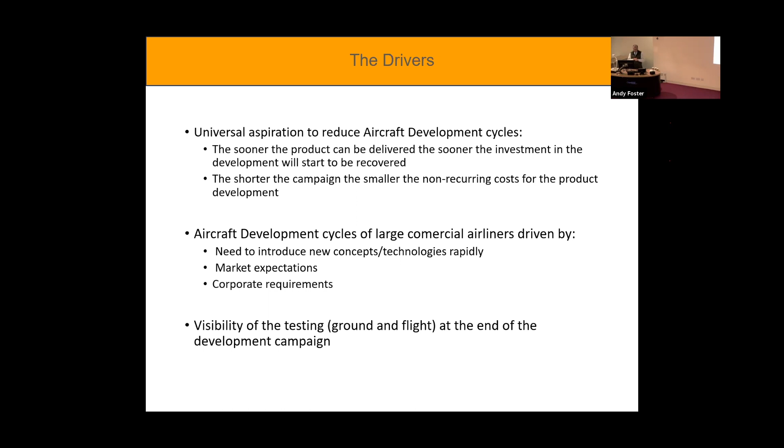The fact is that when you look at how long it took to flight test brand new models, starting with the A320 back in 1987, that airplane was certified barely 12 months after its first flight. The A330, A340 was more like 14 or 15 months. The A380 was close to 20 months, if not more.

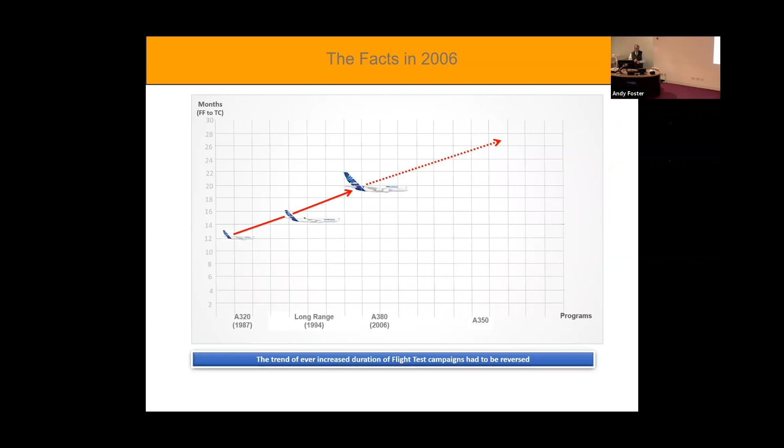I was always asking myself: how can it be that we have more and more sophisticated data analysis equipment, more sophisticated instrumentation, more powerful tools, simulation capabilities, yet we don't seem able, with all those means and processes, to compensate for the added complexity of the airplanes, the stricter certification requirements, the higher expectations of customers in terms of reliability, operational maturity, and the bigger expectations from passengers in terms of in-flight entertainment systems, quality, and better passenger experience.

So on the one hand there was a balance: more expectations on the airplane, more powerful tools, more means of doing it—and yet the net result was that things were getting longer and longer. So unless we changed something, we knew the result that was going to happen on the A350.

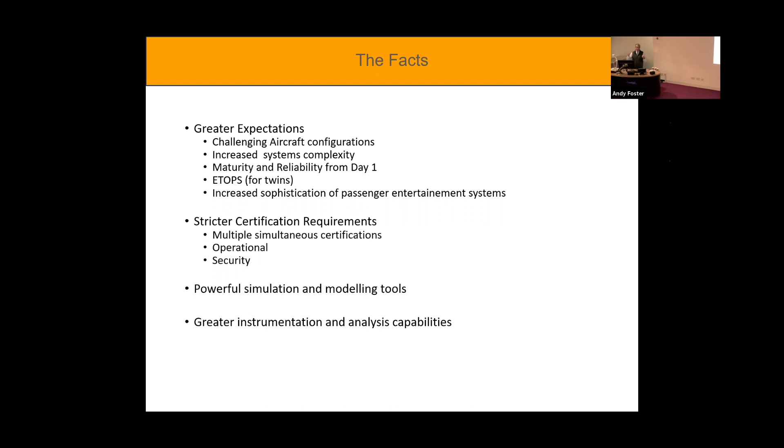So at Airbus, we decided to tackle this problem quickly. This slide lists the number of parameters that were recorded on those airplanes, just to illustrate the progress we made. The A320 had about 12,000 parameters.

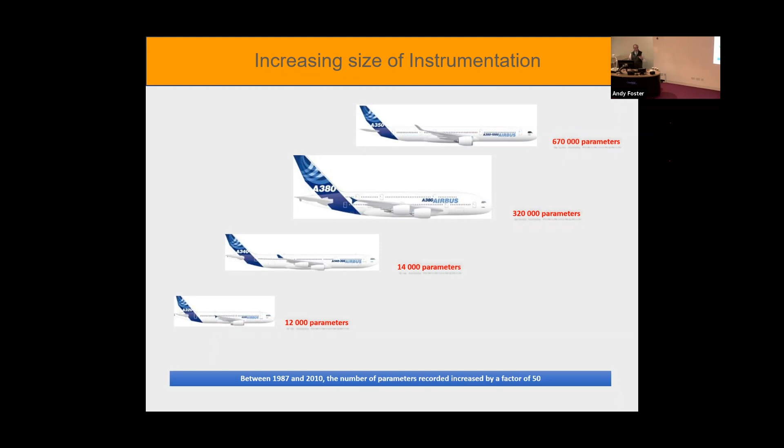The A350 had 670,000 parameters recorded on instrumentation. The investment and the quality of the tools that we had was absolutely enormous, yet the net result was negative.

So what we decided to do, I will be talking today about us flight tests or ground tests, and let me reassure you, it was not just about us. It was the whole company, the whole program, the way the program was organized contributed to this. But we, in the testing area, contributed by doing this.

What we saw is that in the past, in Airbus, we had an organization where each discipline or each engineering organization was responsible for the definition, the design, and the testing of their individual system. There was an organization which was responsible for integrating all the systems.

As the flight test organization, we were just invited or were participating right at the very end of that integration process. Frequently, I had been very vocal with my management to say, so many times we fly and we discover anomalies or behaviors of the airplane or its systems. Did you know about them? And you know what? Many of the times the answer was yes, we knew about them. And well, how come we didn't know?

So there was clearly a disconnect between the testing organizations of the individual organizations and us in flight tests, which were at the end being faced with the program. After that, we decided jointly in Airbus that we had to do something. And since I had been so vocal about it, I said, well, go ahead and do it. So that was a big challenge, but I had very clear in my mind what needed to be done.

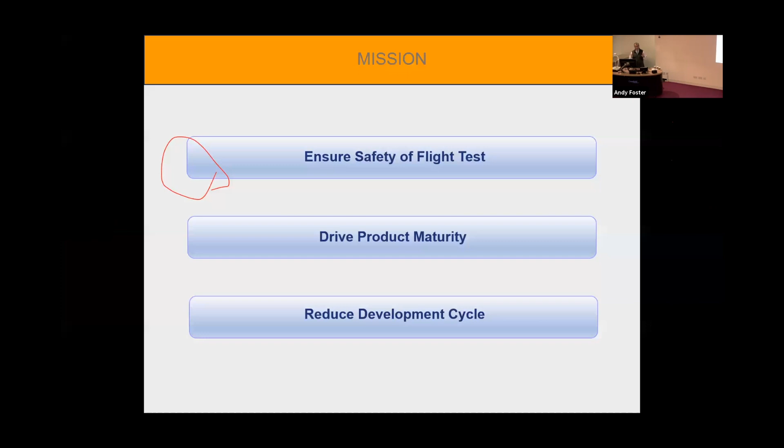We said we want to develop this airplane to drive the product maturity and to reduce the development cycle. Why drive product maturity? Because our customers were expecting an airplane that would be mature as soon as it entered into service. It wasn't the case in the past. The airplanes suffered from malfunctions, failures, difficulties in the operation of the airplane, difficulties in the maintenance of the airplane. And we discovered that late. And of course, the customers were suffering from that.

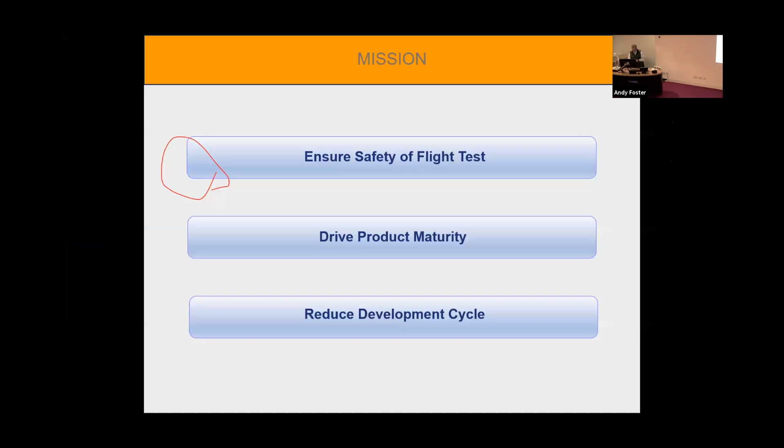And the result, what we were expecting—we tried to quantify it—we said we will reduce the development cycle of the A350 from what would have been maybe 24, 26 months. We'll bring it back to something comparable with what we managed to do back in the 1980s, which was the A320. We committed to 14 months. So that was the challenge.

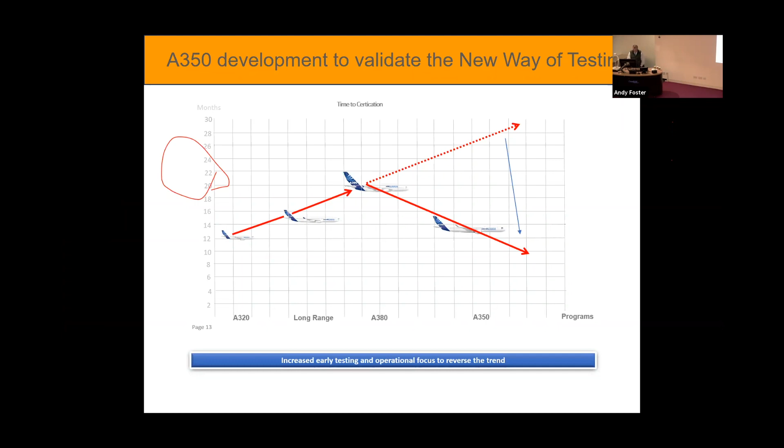Here we had a new product, where everything was new about it. We had given ourselves a new organization, new ways of working, and a very clear objective of what we wanted to do. We wanted to develop this airplane, certify it in 14 months, and achieve an operational reliability of 98.5 at entry into service. So off we went to do it, and we put our focus, first of all, on the people.

As I said, it was all about extracting from the different testing organizations that were spread throughout the different design teams, extracting those teams and those systems, test benches and others, from the design organization and putting them together in a testing organization, so that the same team would be involved in the design of the airplane and in the testing of the airplane, from cradle to grave.

Here, to illustrate that, I've listed 4 or 5 different types of staff of this new organization and where they would be involved. First, people who were defining testing strategies - what type of test means do we want, what type of instrumentation do we need, what type of simulators do we need. They were involved in the development of the A350 from day zero, from the time we were deciding what type of airplane we wanted.

The flight test crews, the pilots, the flight test engineers - they would be involved right from the very beginning, to help the design teams assess the handling qualities, the systems definition, the cockpit interfaces, all of that.

The test means people, those designing and operating the test means, were also involved from the very concept phases, in order to ensure that the airplane and its systems were designed for testability and maintainability. We wanted to avoid designing wonderful systems that were very difficult to test or maintain. So we integrated those operational concerns right from the very beginning.

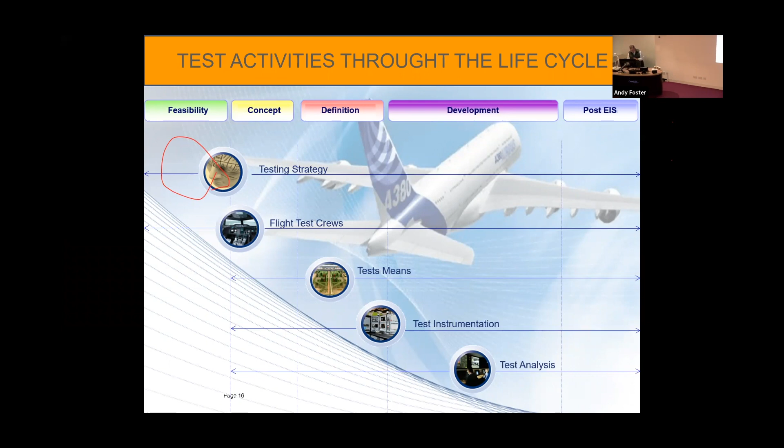And it was more than anything else - I would not say a cultural revolution, but it was a little bit like that. Why? Because we had to position this new team as the challengers of the designers. And of course, in an organization, it's difficult to say, well, why are you going to be challenging me? Are you going to be criticizing me? Do you really mean that?

So it was all about making people understand in the organizations, not just flight tests but throughout, that our job was to look at the product from a different angle than the people who had designed it. The designers looked at it from one angle; we were going to look at it from the other angle, the angle of the operator. At the end, we're building an airplane not just for us, but for our customers. So we wanted to introduce this concept: we are the first customer of the airplane. The sooner we find things we're not comfortable with, or things that don't work, identifying them as a customer would, the sooner we can fix them so the customer never has to face those difficulties.

So it was this change of culture, a different way of working, and early involvement of the test teams very, very early in the program, so they would get familiar with the behavior of the systems and the equipment.

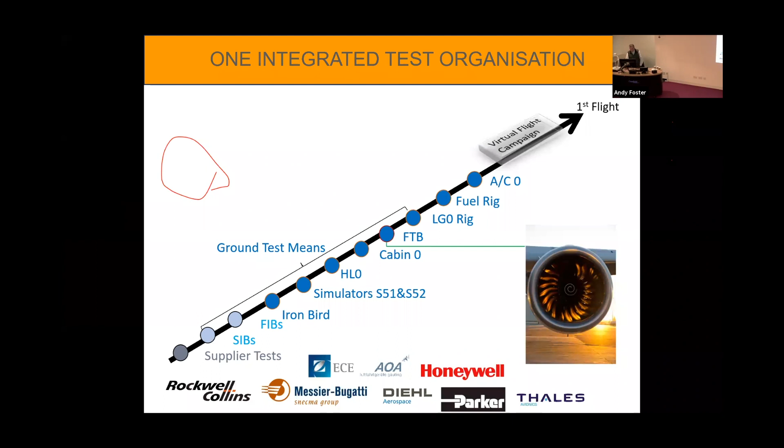So the whole point of that was to try to test upstream as much as possible, to learn as much as you can about the airplane and its systems. The sooner you test, the better it's going to be. So by the time we got to the first flight, I think we were in a really good condition.

And here I've put some pictures of the most impressive rigs. I was always really impressed by these big, huge rigs. This is the flap and slat rig, high lift rig, which is sitting in Bremen.

The flap system of the A350 is very sophisticated. It does not just do high lift to increase the lift of the airplane. It does flap cruise control, so the camber of the wing changes in cruise depending on the CL of the airplane. It is used to laterally trim the airplane. There's differential flap settings to improve the takeoff configurations and the landing drag. So it does a lot more than just purely high lift configurations like we know them in conventional airplanes.

So we had this fantastic facility in Bremen, and they were able to experiment with that, and we did learn a lot from the operation of the flap system. It was the first time we developed something like that. So we knew what we wanted it to do, we're not sure how to do it. So this was really very helpful in developing, troubleshooting, and fixing issues on the high lift system before we actually flew the airplane.

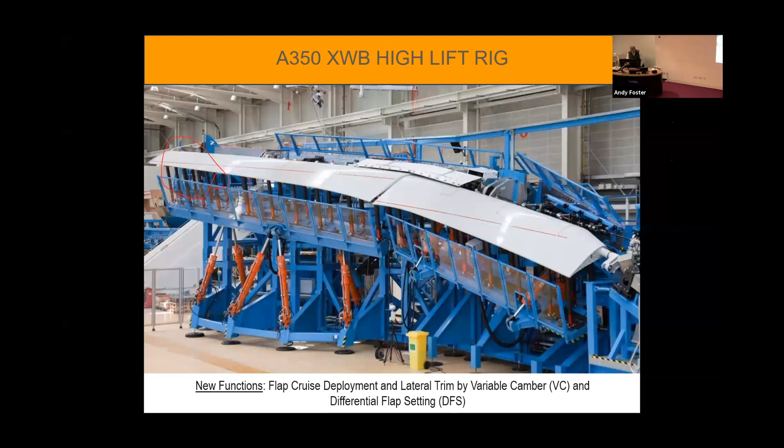This is just to give you an order of magnitude of the amount of testing. Roughly speaking, I don't remember the dates - I could find them, but I don't remember them. But roughly speaking, all these big test rigs were available about a year before the airplane flew. So there was a big effort. Again, it was all about anticipation. The sooner we get them, the better.

However, they cannot be just in any configuration. So it was all about - and the A350 program did a tremendous job - synchronizing the availability of the test rigs and the availability of the equipment to install those test rigs. Because if you have the rig but you don't have the equipment, you have done nothing. So it was all about coordinating and making sure that you have the rigs at the right time with the equipment to feed them.

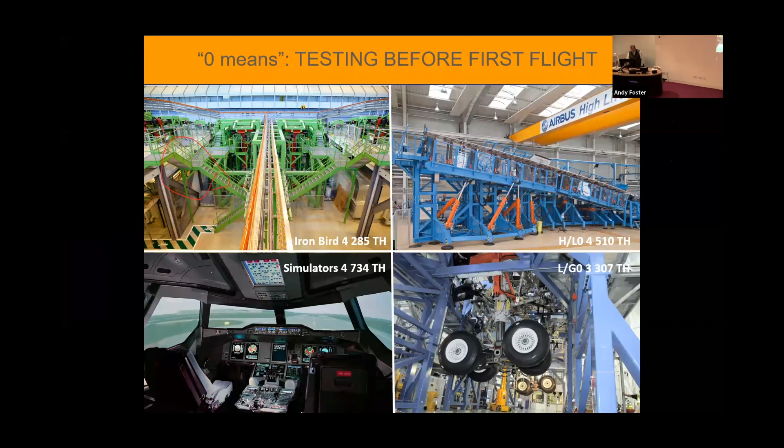And as you see there, these are the hours that we did on those rigs before the first flight. So over 4,000 hours on the Ironbird and on the high lift system, over 3,300 hours on the landing gear rig in Filton. Simulators, we had 2 simulators, 4,700 hours. So as you see, a massive amount of testing. Fuel rigs, 670 hours of testing, cabin 1,500 hours. So it was all about not just testing continuity, but testing as early as possible.

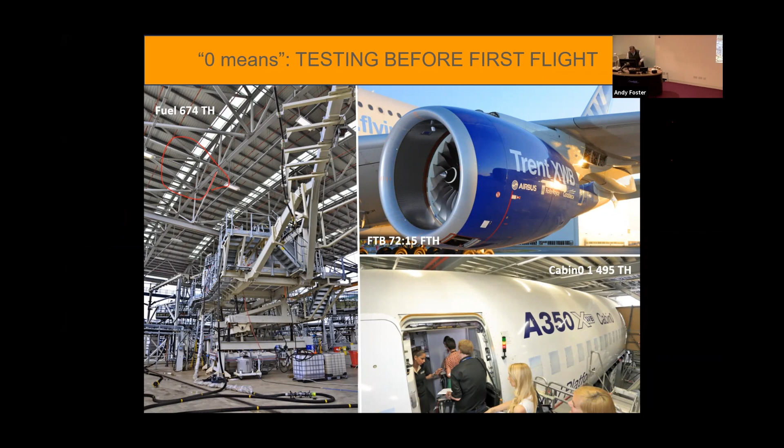Try to advance as much testing as you can. Don't wait until you fly to test. If you can only test certain things in flight, so be it. But anything that can be tested on the ground, let's test it on the ground and just learn from that. So that was the focus of the new test organization.

The flight test program of the A350 was, in a way, quite conventional. We had 5 test airplanes involved in the development. The first 2 airplanes were very heavily instrumented. We had 2 airplanes with a cabin interior, just to illustrate the importance on big commercial airplanes of the cabin. No-go items are flight controls, computers, but no-go items are also toilets, or in-flight entertainment systems. So you could have an airplane not being dispatched because some toilets don't work. You can have an airplane not dispatched because the in-flight entertainment system does not work. So the frontier between what is critical and what is not critical is blurred in the commercial world. That is why we have 2 airplanes with a complete cabin, 2 airplanes with heavy instrumentation, and 1 with light instrumentation, mainly devoted to avionics and autopilot development.

The total was supposed to last 14 months, and we were supposed to fly 2,500 hours.

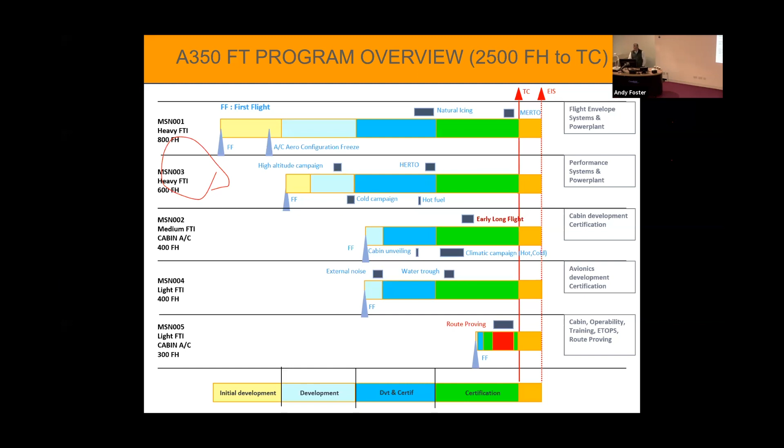Do we have the time? How are we doing time-wise?

It's okay. So let me show you a little video of the first flight of the A350, which is very emotional. You've probably seen me - I look much younger than I am now, but that was many years ago.

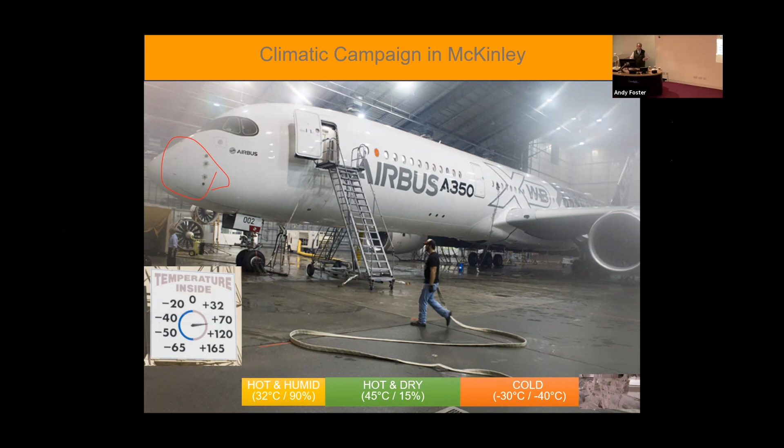I think you saw images already in the initial shot, it just shows the airplane. I have to say in that facility, you're able to operate the engine, so you can start the engines and run them at idle, which is also part of the game. When it's hot or cold, starting of the engine, oil leaks, fuel leaks, things like that is important. So it is important to pressurize all the systems.

So we could at will just change the conditions of the airplane and be able to test again in a controlled way, knowing the time it's going to take. We could test so many different configurations without necessarily having to have passengers and having to stabilize them. So this was a very effective tool that we developed in order to test.

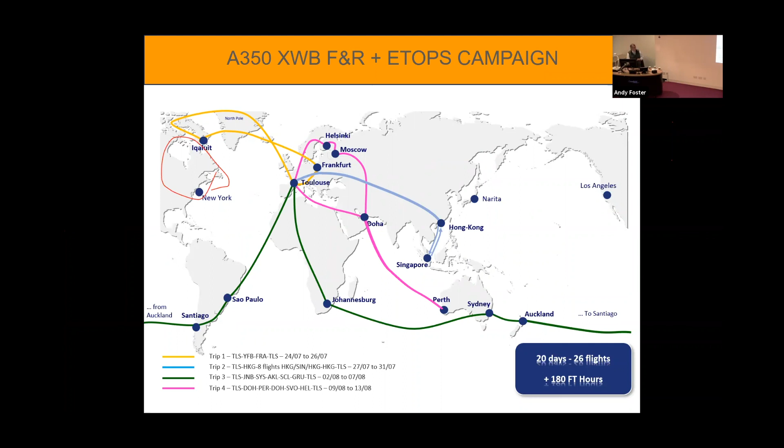I also want to focus on something we did differently, which for me was fundamental. Remember at the beginning, I said the objective of this new organization was to reduce the development cycle, but also to improve the maturity of the airplane. We believed that during the flight test there was a lot of data that we could use and was not being used about the operation of the airplane.

So what we said is we will operate our airplane as if we were an airline. The flight organization was the first customer of the airplane. We called ourselves Airline One. And we will operate, maintain, and make modifications of this airplane as if we were an airline, with the same type of organization as an airline.

Of course, we needed to protect the fact that we were doing flight tests, so the priority was flight test. In a nutshell, it was, okay, we have to do work on the airplane, go ahead and apply the normal airline procedures, the maintenance manual, the troubleshooting guide, whatever, try to fix the airplane or configure it. If you don't manage at takeoff time minus TBD hours, say 2 or 3 hours, end of the game, now you go into commando mode and get the airplane ready to fly.

So we try to mix those two things: what can we learn about how to operate and maintain this airplane whilst respecting the objective of doing the tests we have to do. So we organized a structure we called Airline One. The purpose was to operate, maintain, and work on the airplane using the same procedures, the same manuals, the same processes as an airline would use, and use the findings from doing that.

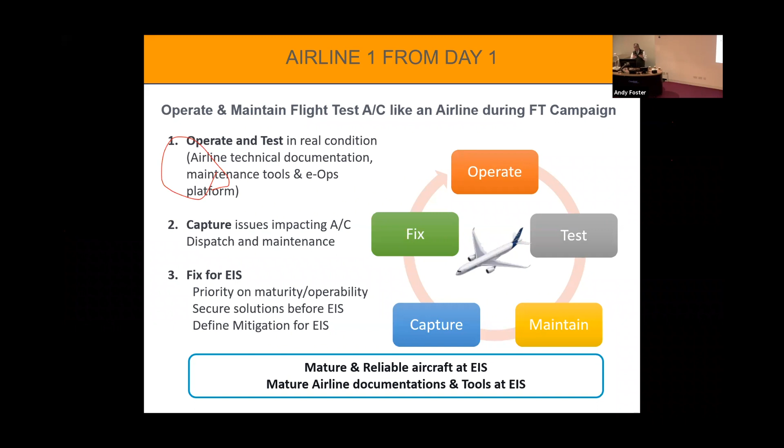A lot of things would not work. The manuals were not clear. The e-logbooks were not working. All that kind of stuff. But because we were exercising it from day one, we found anomalies. We were able to capture them and try to correct them as soon as possible before entering into service. And so this is how it was organized.

We called it Airline One. It had a flight operations department who had an operations control center, an e-operations, that was responsible for generating our flight plans, generating our operational documentation, NOTAMs, you name it, flight planning, all that.

And we had an engineering organization responsible for maintenance, which included production planning and a maintenance control center—the people who would plan the modifications planned for the airplane, the maintenance activities planned, to which we had to add malfunctions and failures that happened during flight test. Then the maintenance control center would integrate both the routine maintenance activities and the results of the flight tests into a working plan for taking care of the airplane.

We had our own facilities. We had flight line and line maintenance facilities. We had our own hangar to make modifications on the airplane. This airplane is carbon fiber, so whenever you have to do any modifications on the structure, you need curing times or specific temperatures. So we had that. And we had an operations center using the same tools, the same applications that the flight operations organizations of the airlines would be using.

Another cultural revolution was we said, well, we are going to be operating as an airline, but do we really know how to operate as an airline? Of course, the customer services guy says, yes, we know what the airlines do, we're just fine, come and join us. But I was uncomfortable and I said, well, the ones who know how to operate are the real airlines, so I want the airline people to be with us—flight operations people, maintenance people, engineering people.

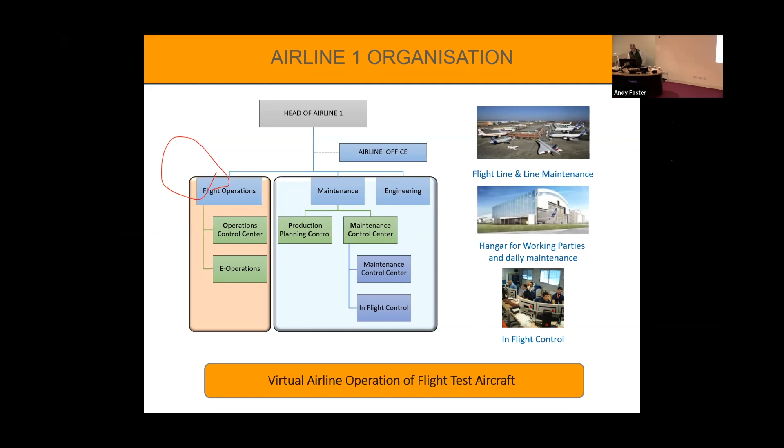They helped the customer services team in making sure that the manuals, the logbooks, the iPads and all that stuff were right, but also engineering teams, the design teams, prioritizing what fixes would be needed and when. Very, very powerful.

And that again, of course, when you come towards the end, it's all about how can you quantify. Was that really worth it, or was it not worth it? So the first area where we started to see that it was really worthwhile, other than our gut feeling...

The first flight went really well. When we were tracking the number of snags that we found during the flight test activity, we saw from the very beginning that the number of snags on the A350, which is the blue line, was significantly lower than the number of snags generated on the A380 per flight hour, which is the red line. Roughly and quite consistently throughout the campaign, we generated half the snags that we had generated on the A380. I'm sure you can imagine the value of that.

All those snags are items that don't need to be analyzed and don't need to be investigated because they're not there. Probably they happened before, those snags we saw previously on the simulator, on the rigs, or on the supplier testing. I'm not saying the A350 was so much better than the A380. I'm just saying, if you accept the fact that there will always be anomalies, for me the difference between those two lines shows that probably all those things happened before. We captured them before, and therefore they did not happen later. So that started giving us a flavor of what we were getting out of that. Very positive results.

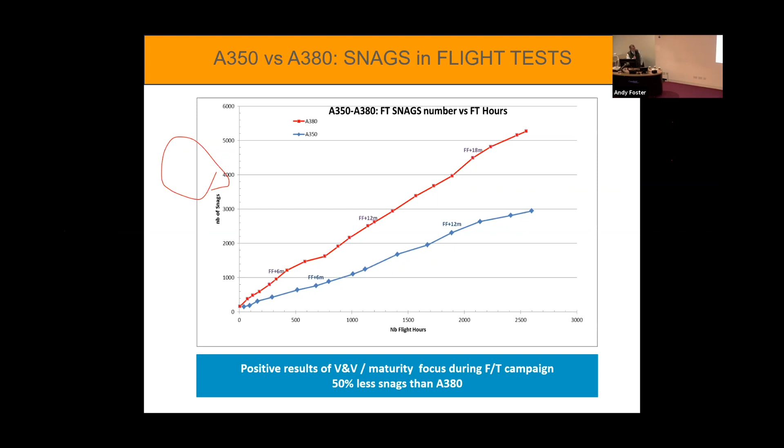We started tracking the contribution to the operational reliability. That's the bottom left hand of the individual chapters. We were measuring the numbers of removals, and the chart on the left is the operational reliability as we were measuring it ourselves. We saw that it had very big fluctuations, but with time we got really good at it, and people really started feeling there was some benefit to get out of it.

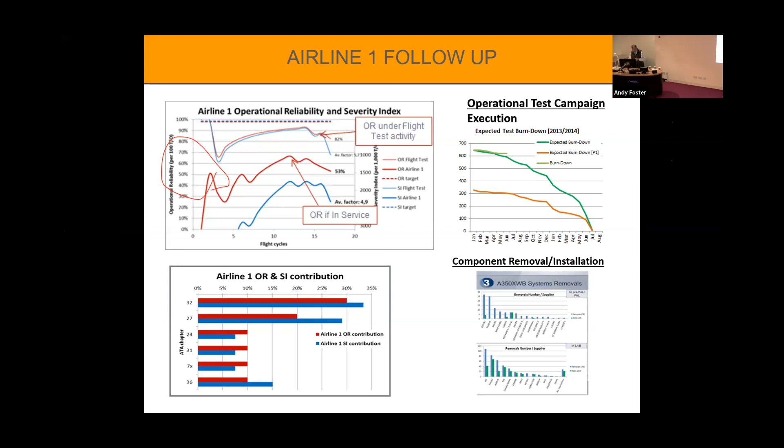However, I think what we saw is that in other projects, we started from a different level. The customers might not be happy, but then it took us forever to converge. Here, we converged within two years. Why did we converge within two years? Because a lot of the modifications that would contribute to that improvement in operational reliability were already in the pipeline.